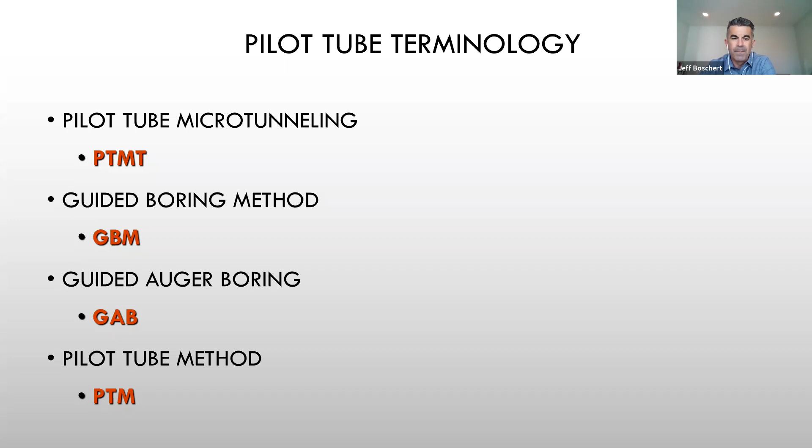We spent about 4 years drafting an ASCE manual of practice, and we published it in August of 2017. We went round and round with what to call this thing, and we settled on, there's a picture of it on the screen, pilot tube and other guided boring methods. It's probably a 90-page manual published by ASCE, and I was one of the principal authors covering this technology.

Hey, I'm going to start with a video. This is one of the original videos, done by Bohrtec. They're a German manufacturer of equipment, and I've got many videos throughout this whole presentation. This one I think is 7 or 8 minutes long, and I'm going to play it now. I don't need to talk because there is sound.

Pipe jacking and microtunneling has been proven throughout the world as an economical and environmentally sensitive method of installing underground services.

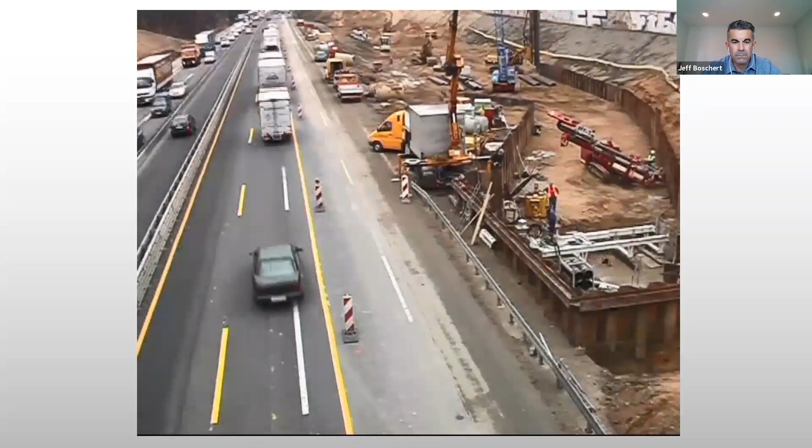The advantages of this technology are obvious, especially in towns and cities, where utility services can be installed underground without disrupting traffic flows or interfering with daily life.

The special advantages of the guided auger boring systems, like the quick setup times, minimum site facilities, high jacking performances, simple operation, and low capital investment, can combine into a highly profitable operation, which has been demonstrated worldwide by the installation of over 300,000 meters of ducts and drains.

The following sequence shows the laying of a 400 mm diameter sewer in a residential area using a Bohrtec BM400 with double-walled pilot rods and groundwater auger.

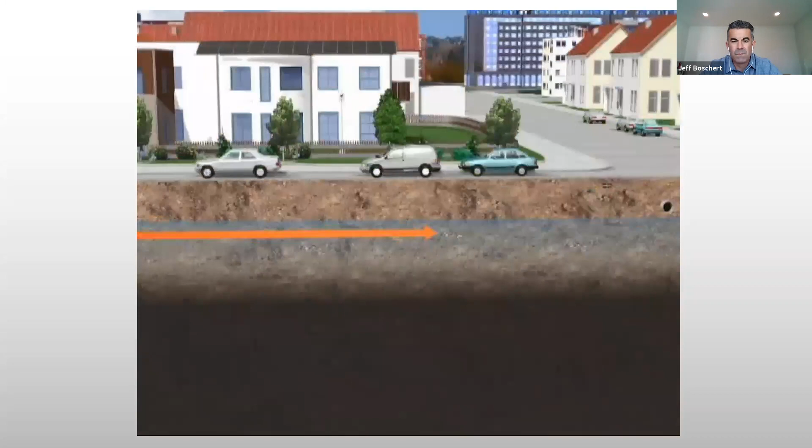The sewer is to be installed 4 meters below ground level and below the groundwater table from a working shaft of 2 meters diameter. Traffic is unaffected, and the new line can easily pass beneath existing services. Damage to the roots of trees and bushes is avoided by the use of this method.

Work on site commences with the construction of the launch and reception shafts by the caisson sinking method. The precast concrete sections are sunk into the ground as the soil inside is removed by the excavator. To avoid ground loss, the water level inside the shaft must always be higher than the water table in the surrounding ground. When the shaft has been sunk to the required depth, the concrete base is placed underwater.

The compact site setup consists of the boring container, the hydraulic power pack, and racks for the pilot tubes and auger casings.

After positioning the boring container above the launch shaft, the crane is extended so that the BM400 machine and base frame can be lifted out of the container by the 2.5-ton hoist. The cover boards are removed from the floor opening and used to form the guardrail around the top of the working shaft.

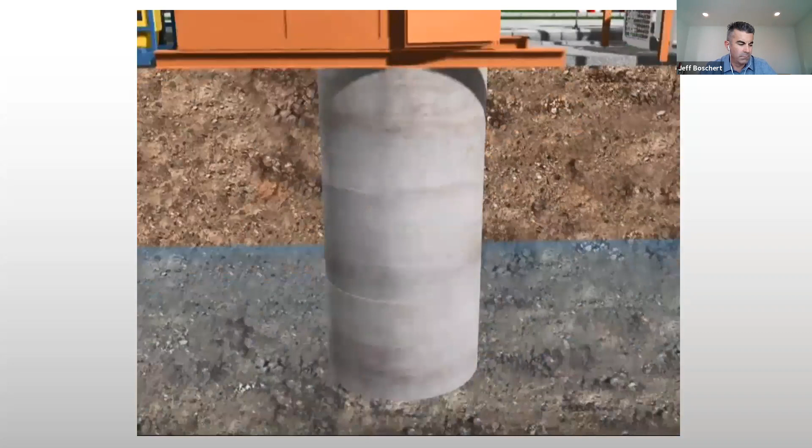The base frame is first lowered into the shaft and easily set for height, grade, and line before being braced in position. The BM400 is then placed on the base frame and fixed in position. Use of the base frame simplifies the operation and eliminates the difficult time-consuming job of aligning the boring machine.

After the machine is set up, the guidance system is installed. The theodolite with its electronic camera is mounted on a height-adjustable support, independent of the machine. The theodolite is set to the required height, grade, and direction. A monitor screen fixed onto the wall of the shaft allows the operator to view the target through the theodolite-mounted camera during the piloting operation.

The first step is to install the pilot rods. The double-walled pilots consist of a pilot head with an integral LED target, an outer screwed casing, and an inner pilot rod.

As the pilot is advanced, the camera on the theodolite can view the LED target on the pilot head through the hollow pilot rods, and the crosshairs on the monitor screen indicate the correct alignment. By rotating the inner pilot rods, the operator can turn the pilot head to use the inclined plane at the front to correct any deviation from the intended line or level.

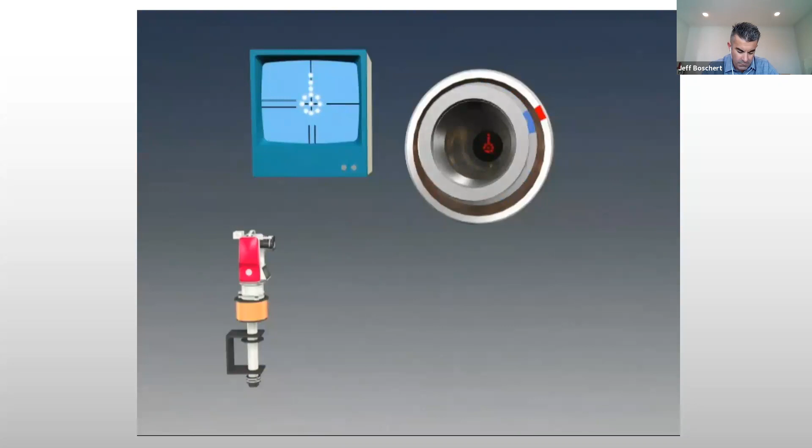The pilot head is pushed out of the launch shaft through a flexible seal and into the soil. Pilot rods are added and jacked into the ground.

The pilot rods are jacked into the ground without rotation, but if any deviation from the intended alignment is visible on the monitor, the jacking is stopped and the pilot head is rotated to correct the deviation, after which jacking continues. The inclined plane on the pilot head creates a reactional force from the surrounding soil to achieve the steering correction.

When the pilot head arrives on target at the reception through the seal, the pilot rods with the pilot head are disconnected and lifted out of the shaft.

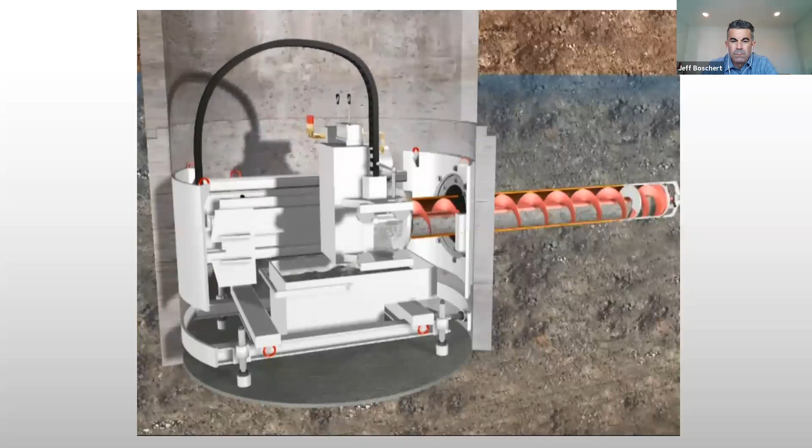The pilot rods are then followed by a reamer coupled to steel casings with augers inside. The ground is excavated by a special cutting head on the reamer and transported by the augers back to the muck skip in the working shaft.

The reamer with the groundwater auger is connected via steel arms with the pilot rods. The special cutting head works behind the steel arms.

In the case shown, the reamer is designed as a groundwater auger. In the first steel casing there are two bulkheads, each with openings in the lower area. The auger in this casing also has two bulkheads, with their openings 180 degrees apart. Thus, only one pair of openings through the bulkhead walls is open for the transport of excavated material at any time during rotation of the auger. When the back bulkhead is opened, the front bulkhead is closed. When the back opening starts to close, the front one starts to open, and vice versa.

The excavated material that is conveyed out by the augers falls into the muck skip in the working shaft. After the completion of each boring stroke, the muck skip is lifted out of the shaft and emptied before the next casing and auger are put in place.

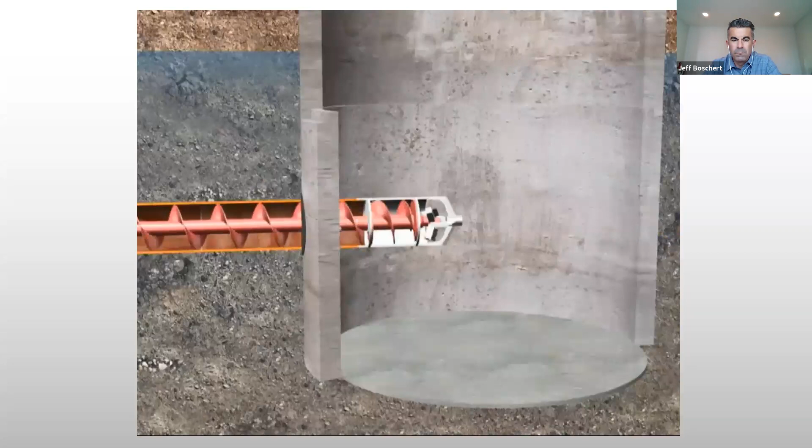When the reamer reaches the reception shaft, it is disconnected and lifted out.

If product pipes to be installed have the same outer diameter as the casings, then the first product pipe is coupled to the casings in the launch shaft and jacked into place in the third step of the operation, like the clay pipes in this example.

During this operation, the jacking force only has to overcome the skin friction.

As the product pipes are jacked into place, the augers and casing are disconnected and lifted out. When the last casing reaches the reception shaft, the jacking procedure is completed. After an inspection, the sewer can be commissioned.

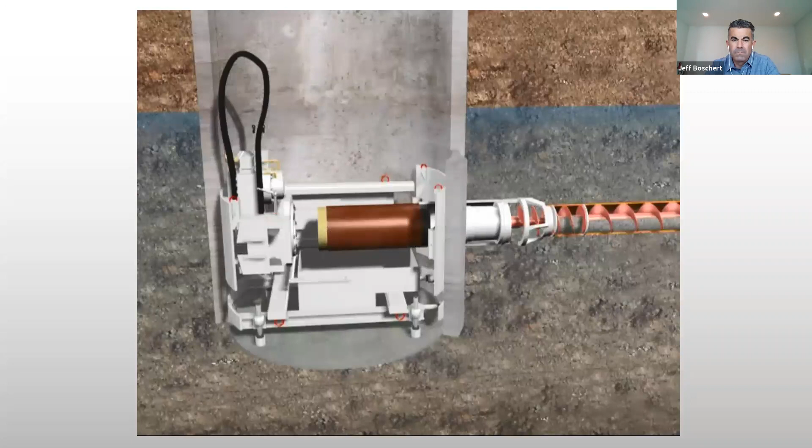If a sewer with a bigger outer diameter is to be installed, a second reamer enlargement is used for the third step. In the launch shaft, a reamer with a direct drive unit is coupled to the last casing. The product pipes are pushed in directly behind the reamer. The drive unit in the reamer is powered through hydraulic lines that are laid through the following product pipes.

The ground is excavated with a special cutting head and transported through the steel casing to the reception shaft by the anti-clockwise rotation of the augers. The excavated spoil is removed from the reception shaft.

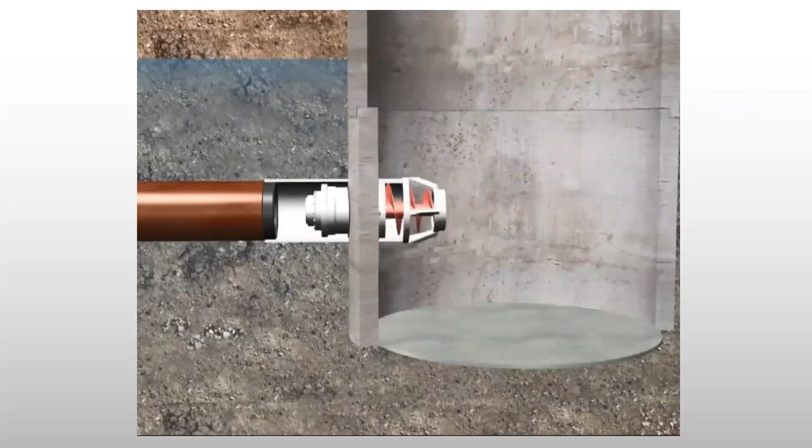When the reamer reaches the reception shaft, the sewer is complete. The process technology shown in this presentation makes it economically possible to achieve the benefits of trenchless technology, where previously open-cut trenching methods, with all the disruption and disadvantages, would have been used.

Yeah, that's a pretty good video that they put together. Back when it was sort of in its infancy stages, this method. But I guess as you can see, this method is...

It's highly accurate. It's a guided system of tunneling, and because of the kind of accuracy that it has, it's primarily used for gravity flow pipelines, but it doesn't have to be.

The video showed sort of the generic method, which is pilot tubes, and then the reaming head and thrust casings, followed by the product pipe of the same size. And then they also showed there at the end, if you had a larger diameter product pipe, to go in with a powered reaming head.

But the accuracy of this system is about a quarter inch in 500 feet on line and grade, and the way it steers, there's no ups and downs. It's like a rifle barrel.

But the construction of these projects begins with the installation and building of the shafts. An 8-foot round is the smallest jacking shaft that you could have, and it's pretty common, 8-foot round pits, and they're dug with an auger rig.

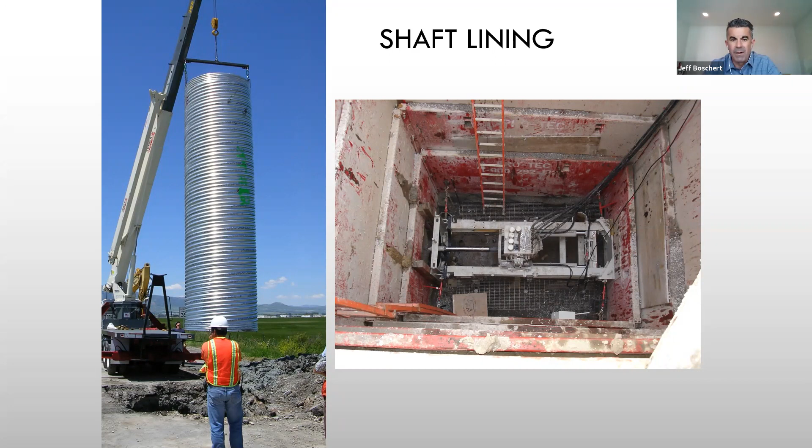This is a video of a shaft installation. I think it's a video of, they've already dug the shaft and they're dropping the liner down to the bottom.

This is another round shaft, larger size, but this was a deep shaft on a project I was involved in, north of me in Milwaukee.

But this is what they call a ring beam and wood lagging shaft, and these are constructed—they dig down and construct another ring and keep going down. And this one was about 45 feet deep, dug with a long arm excavator and then a mini excavator in the bottom.

But this one, I think, is a 12-foot diameter on that bottom section, and they've tunneled out three different runs out of this.

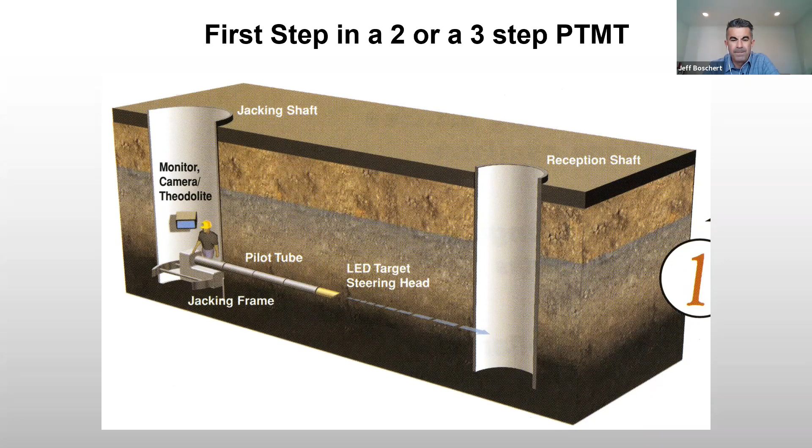Again, for displaceable ground, there are several different angled steering tips that can be put on - there's a 30 degree, a 45 degree, and a bullet. It all depends typically on the SPT value or blow count values of the soil they're tunneling through.

Step 1 in the guided boring method is the installation of the pilot tubes on line and grade. The 4-inch pilot tubes are pushed through the ground from the launch to the reception shaft. The leading end of the pilot tube is the angled tip steering head, which holds the LED illuminated target visible through a theodolite, camera, and monitor. The theodolite and digital camera are set on the desired line and grade and positioned to view the target through the center of the pilot tube. The crosshairs of the theodolite are visible on the monitor along with the illuminated target.

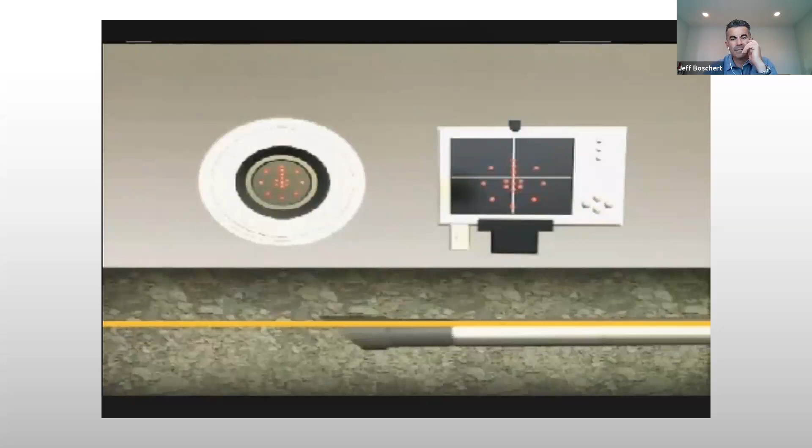The operator rotates the steering head as needed to maintain the desired line and grade. By using a computer monitor and digital camera to view the output, the signal can be digitally enhanced, allowing for an extended run. This guidance system has ensured line and grade tolerance of 1/4 inch in distances exceeding 500 feet. The dual-walled pilot tubes provide a means to lubricate the outside of the tubes as they pass through the ground, which reduces the force required to thrust and rotate during installation.

I just can't stress enough how accurate the system is. This was a photograph taken of an existing manhole that they were saving, and the contractor, on his second drive, rented the equipment and was tunneling.

I think it was a 12-inch pipe into this existing manhole. So he set up a jacking pit, and then sent a crew down at the receiving shaft, which was again this existing manhole, and they cored a 6-inch diameter hole in this manhole to accept the pilot tube. This was back in 2016, a 280-foot shot from the jacking pit to this existing manhole, and you can see how accurately they hit this hole that they cored.

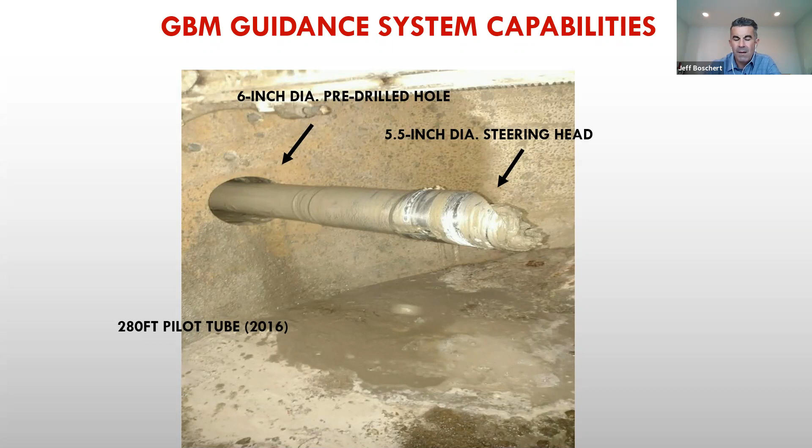Okay, this is the second step, kind of like you saw in that first video done by Bohrtec. So again, the pilot tubes are installed from one end to the other. That was the completion of step 1.

Step 2 is they install a reaming head, followed behind by an auger, or some people call them thrust casings. At this stage of the game, they're taking on spoil. So the spoils around the displaced ground, if you will, around those pilot tubes would enter this reaming head and then be augered back in typical auger bore fashion back to the jacking shaft where it's removed.

The earlier video you saw showed they had a muck or skip box down within that frame. When it gets full, they have to pull it out and unload. Some of the guys here around the country use a vacuum truck, and they send that 4-inch vacuum pipe down to the bottom, and they just vacuum it out as they install.

All the guidance equipment that you saw in the first step slides, all that comes out, because once the pilot tubes are in, everything else that goes in behind them follows that same on-grade path.

At this second step, there's a crew at the receiving shaft. As they get a full stick of pilot tube entering the shaft, they take it apart and it comes out. Then there's a crew at the jacking shaft end installing temporary augers and casings, and taking spoil out at the same time they're pushing. The two common sizes for reaming heads and auger casings behind the pilot tube are 11-inch OD and 16-inch OD, the two standard sizes that are made.

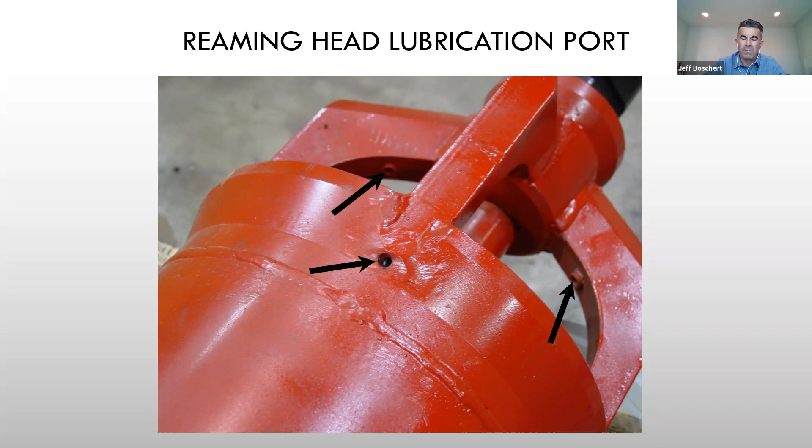In order to hook up a lube line to that reaming head - this is a picture in a receiving shaft where they've already installed the pilot tubes - they would send a commonly 3/8 inch diameter line through that hollow pilot tube, because they don't need that hollow path anymore for line and grade since the grade's already been established. It hooks onto the front of one of these reaming heads, installed directly behind, and provides a path for lubricating the friction or the spoil inside.

Okay, here's a video of step 2, what we just talked about.

Step 2 is to increase the bore diameter by following the pilot tubes with a reaming head that matches the diameter of the final product pipe. The reaming head and temporary casings and augers are attached to the pilot tubes and advanced by the jacking frame. As the temporary casings advance, they push the pilot tubes into the reception shaft, where they are removed. Spoils are removed and transported by the augers back to the launch shaft and fall into a dirt bucket, which is emptied when full.

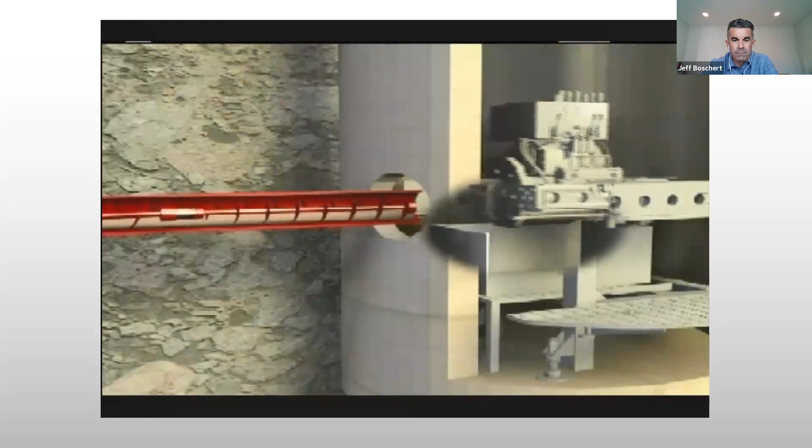Okay, the final step, and this is the generic process where the OD of the final product pipe matches the OD of the auger or thrust casings installed in step 2. Again, the two most common sizes for those casings are 11 inch OD, and for a clay jacking pipe, that's an 8-inch ID jacking pipe with an 11-inch OD. So that's the size. When 8s are installed, it's always done this way, size on size.

So 4-inch pilot in step 1, 11-inch auger casing in step 2, and then 8-inch jacking pipe in step 3, and then they're done with that drive, or 12-inch. The OD of 12-inch jacking pipe is about 15.9, so the 12-inch would follow directly behind the 16-inch OD size casing. But in this step, the load on the jacking pipe is solely the frictional load to push those casings into the receiving shaft. So all they're doing in step 3 is replacing the casings with the pipe.

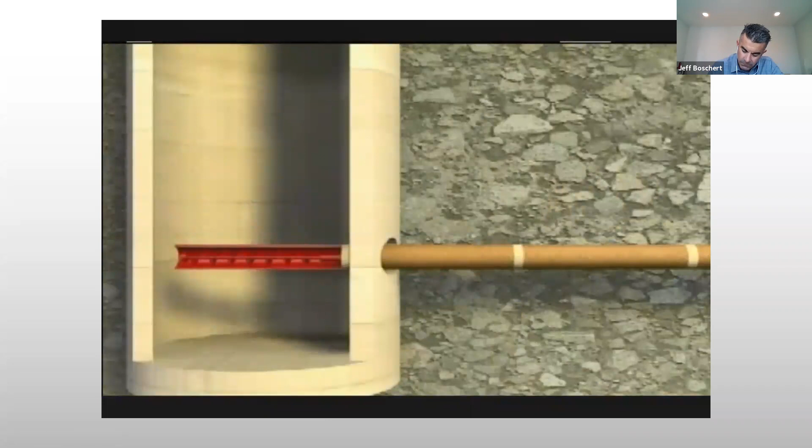Step 3 is the installation of the final product pipe. A pipe adapter is installed on the last section of the temporary casings and augers to match the final product pipe. Just as the temporary casings and augers replaced the pilot tubes at the receiving end, the final product pipe pushes the temporary casings and augers into the reception shaft, where they are removed. The process is finished when the product pipe reaches the reception shaft.

You guys, I like a lot of videos. I think maybe it grabs attention more, but here's another video. This is one I shot.

This was a project, I live in the St. Louis area, this one not too far from my house. It's an 8-inch pipe, 1 meter, and they're assembling those pipe sections. This is in that third step, and they're pushing out 11-inch, 1-meter long casings into the receiving shaft.

So in this one, you're going to see the guy lubricate the joint. He homes the pipe. You'll see a line — they've got a line running inside the pipe, and it was a lube port at the tail end of the casings. They never did hook it up. They were worried their pressures would go high pushing the product pipe, so they had it just in case, to lube if they needed to.

That's that lube line.

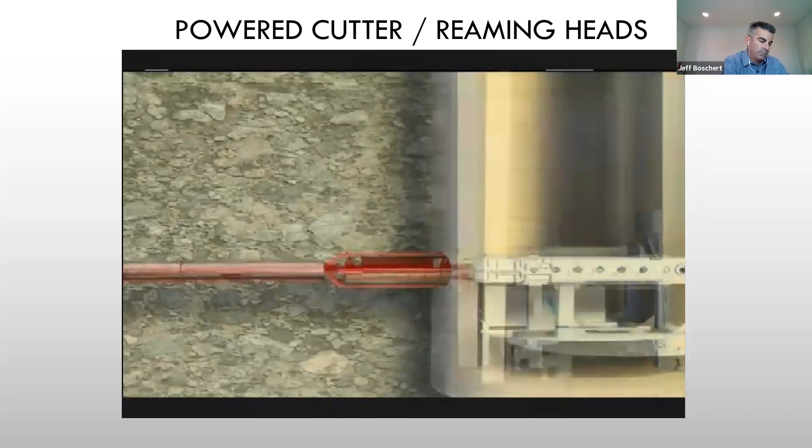The powered cutter head still uses the three-step GBM process. As previously shown, step 1 installs the pilot tubes on line and grade. During step 2, a reaming head and temporary casings and augers are attached to the pilot tubes. The powered cutter head is added in step 3 and is used to increase the bore to match the final product pipe diameter. Final product pipe is added behind the PCH.

The direct drive at the cutter face allows the GBM to work in a wider range of soil conditions while maintaining speed and accuracy. The augers are reversed by the PCH's hydraulic drive, and the spoils are pushed to the reception shaft while the rotating head cuts the tunnel to the final diameter.

Okay, so the powered cutter or reamer typically is for larger diameter pipes, when the final product size is bigger than either the standard casing size of 11 OD or 16 OD. So they would couple on this powered cutter or reaming head and take on the additional spoil.

That spoil enters the front of one of these heads, gets turned around inside, and then sent forward through the augers. The augers are reversed, so this additional size that they're cutting on the bore gets sent to the receiving shaft, along with the thrust casings installed in Step 2.

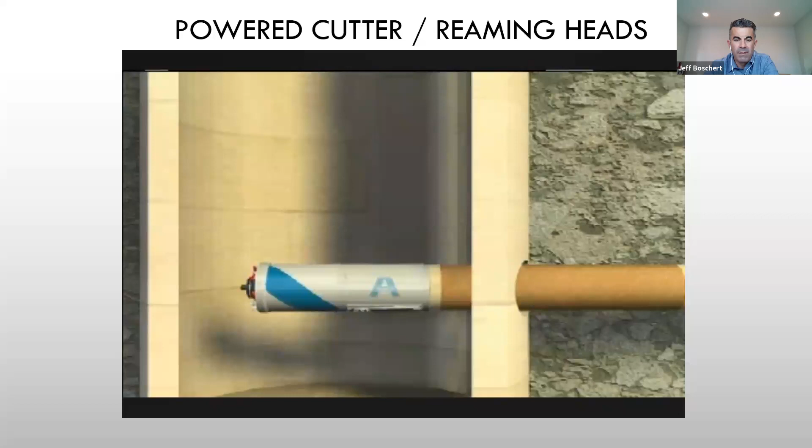And these are some of the common sizes. There's a 20-inch, a 22.5, and a 28.5 powered cutter, and then there's two larger sizes, a 36 and a 44 OD.

So looking at the front of that powered cutter head, you can see what looks like the spigot end of one of those 11-inch OD casings. So they would lower this section down, and it would hook up to the last casing installed in Step 2, and then the jacking pipe would advance this unit because it's the same OD.

So this thing's doing two things. It's got a rotational cutter spinning that's cutting this additional ground from the 11 OD up to 22.5. And then there's 4 windows in this particular one. So as the soils are cut by these picks, it would enter the head, get turned around inside, and then sent forward through all those casings installed in Step 2.

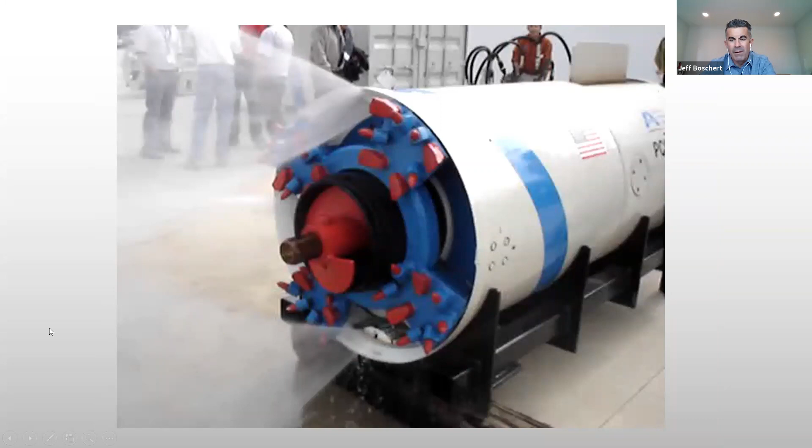Here's a video here. I took this at a demo. I forgot where, but these powered cutters, they've got jets in the front to ease that spoil travel. So this was one. You can see how this thing drives.

That one there is a 36-inch OD unit, but you can see, it's got several drive motors in it. One or two drive the powered cutter itself, and then the other one powers the auger inside in that reverse direction.

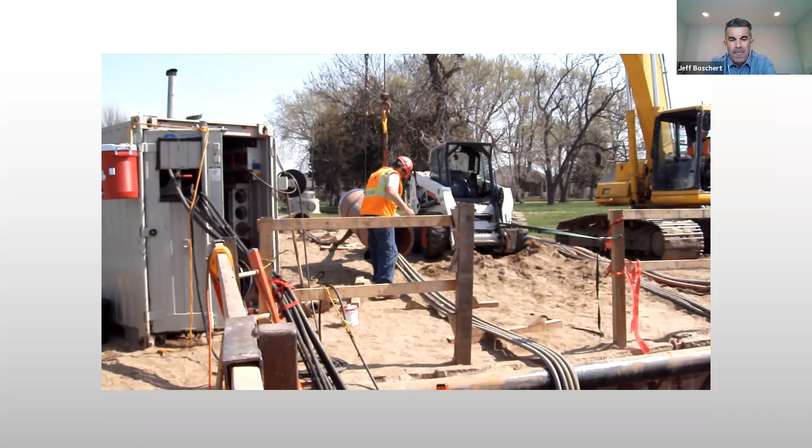But what I didn't mention, and you saw it in the video, whenever there's a powered cutter or powered reamer project, something's got to drive that unit. There's hydraulic lines that have to be snaked through the jacking pipe. So commonly they stage the pipe at the surface with the hydraulic lines already mated inside of them, and then they've got to lower those pipes down with the lines inside to keep going.

So here's a video of lowering one of those pipe sections. This one's a 2 meter. I kind of forgot the size.

But again, whenever one of these is used, remember the spoils are coming to the reception shaft at the same time the augers are. So the guys at the receiving shaft are really doing double duty. They're dealing with the spoil, number one, as well as once they get a full stick of casing and auger, they've got to take it apart as they're pushing pipe.

There's also the powered reaming head, which is really what that first video showed. This is the same concept as the powered cutter, except it doesn't have this wheel in the front to cut soil. And these are commonly available from 14 OD to 20-inch OD.

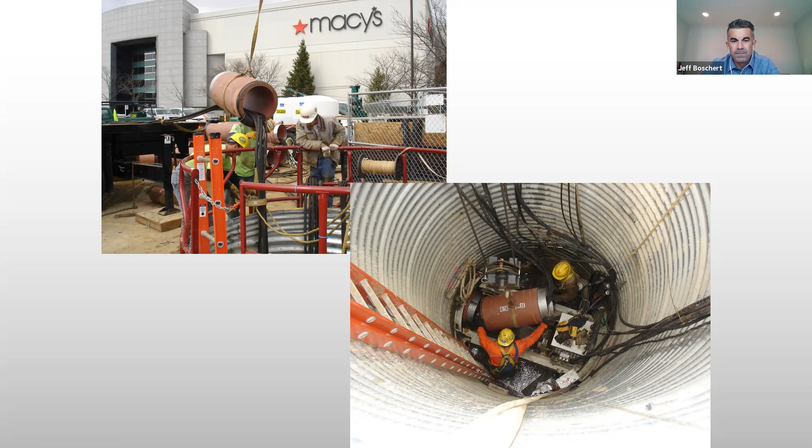This is a shot of a powered reamer, I think from a 15-inch project. This is a 20-inch OD powered reamer, and on the front here, this is a 16-inch OD casing. So they only had to go a little bit larger to push these. There's the 15-inch jacking pipe, that's a 2-meter stick. But again, that pipe is advancing this powered reaming head unit.

Here's a shot of a reception shaft, 8-foot round. This is the 22.5-inch powered cutter head for 18-inch pipe being retrieved. Notice the muck box in the bottom. These guys were dealing with the spoils as well as the casings, and this is the final step here of the pipe pushing that powered drive unit, powered cutter head unit into that receiving shaft.

There's another process I didn't talk about yet. What I just showed was the conventional 3-step method, with the size-on-size jacking pipe to auger. And then I also showed the increased technology where in that 3rd step you've got a powered cutter or powered reamer with a larger diameter jacking pipe.

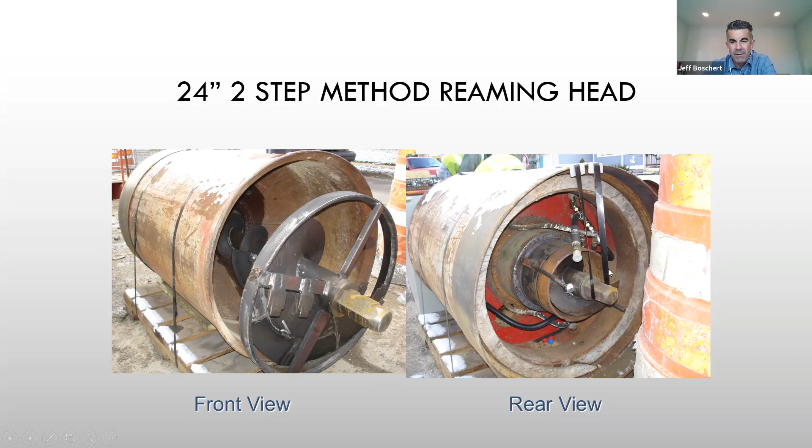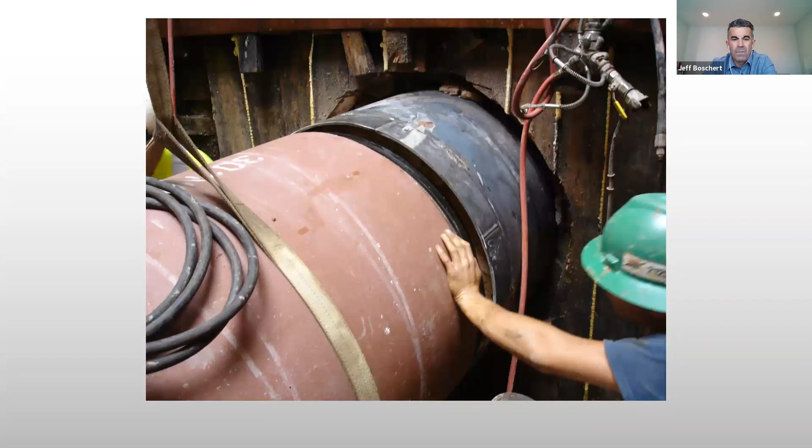I guess I'll say one more thing. This is the end of that two-pass discussion. But really the advantage of the two-pass is...

The contractor would only have to invest in the frame, pilot tubes, and say he bought 11-inch augers, he could buy a couple different size two-pass heads and be able to install multiple pipe sizes for a project or projects, just by buying a different sized two-pass head. So that's the advantage for the contractor. The disadvantage is necking down on the material and having a possible problem.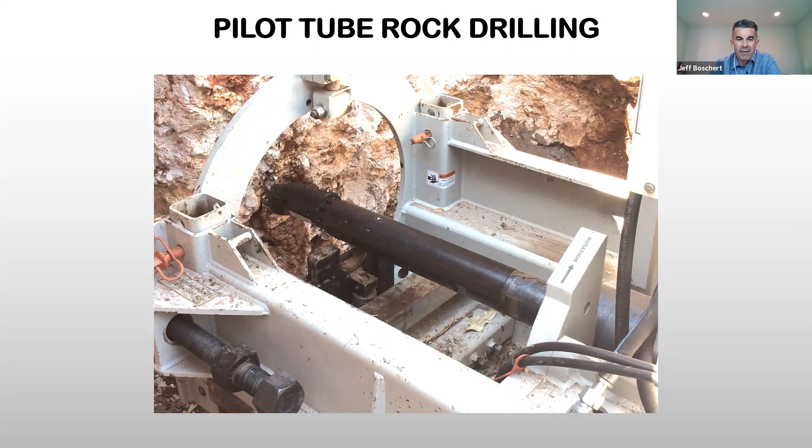And then this is a video of going in with a rock drill, one of these rock drills. And again, they're not displacing the soil. They're cutting it, and then the cuttings are being blown back into the jacking shaft. So here's a video of going in with one of these rock drills.

But anyway, the way this works is they're rotating to cut, but then they're actually guiding it. They can still guide it, change directions. They can still guide that thing on line and grade because they've got the same theodolite camera, LED target, monitor screen. But they've done up to about 12,000 PSI rock, or if you want to call that soft rock, you could.

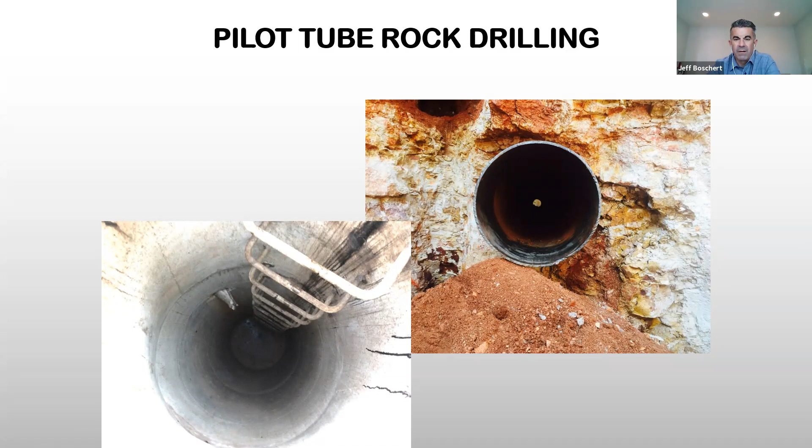Another shot here of some of this hard ground rock drill equipment. This was some kind of a red shale stone that they were cutting. Again, non-displaceable type ground.

Hey, this is a video. It's another one done by Boschert, the German manufacturer, and you know, this is guided boring, but without a pilot tube. Both of the two manufacturers of this equipment, they make this guided boring, but there's no pilot tube. And what they both use is a hollow stem auger, and that's what provides that sight path to the target. And this is for these harder grounds, not as hard as rock, but these SPT or blow count values from 50 to 100. And one manufacturer calls it the front steer, the other manufacturer calls it the eliminator. And this is a video of how that works.

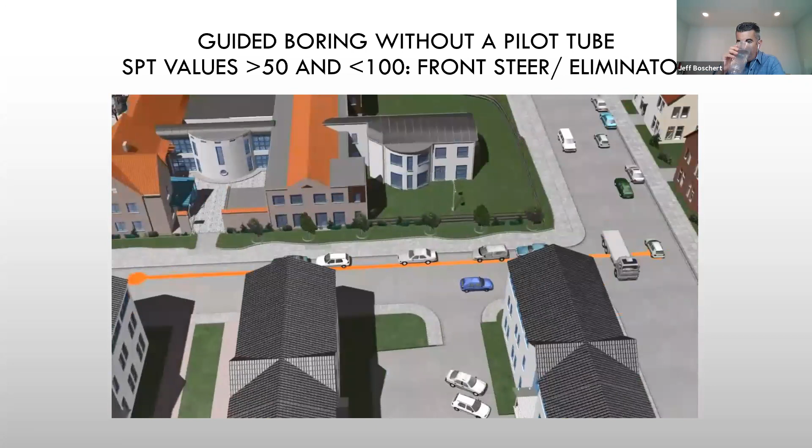The following sequence shows the laying of a 300 millimeter diameter sewer in a residential area. A guided auger boring machine from Boschert with a novel steering technology called front steer is used. The sewer is to be installed 4 meters below ground level in a non-displaceable mudstone from a circular working shaft. Traffic is unaffected, and the new line can easily pass beneath existing services. Damage to the roots of trees and bushes is avoided by the use of this method.

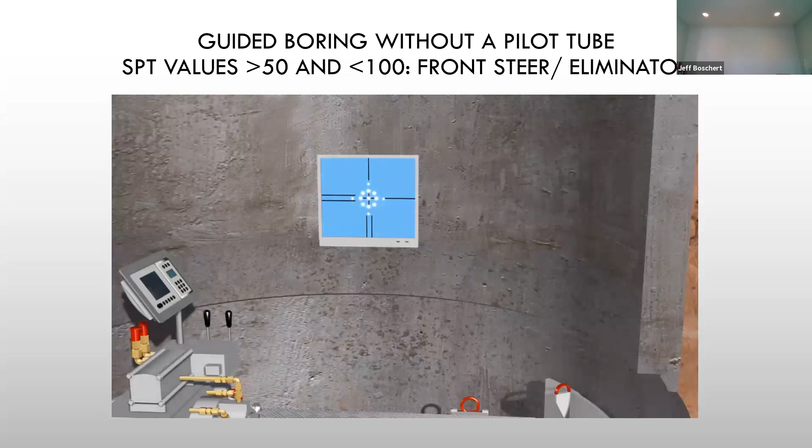After the machine is set up, the guidance system is installed. The theodolite with its electronic camera is mounted on a height-adjustable support, independent of the machine. A monitor screen fixed onto the wall of the shaft allows the operator to view the target through the theodolite-mounted camera during the guided operation. With the help of a steering and control panel, showing the position of the front steer, the operator can perform steering movements.

In the first step, the guided drilling is performed by excavating the soil with the front steer. Hollow augers transport the excavated soil to the working shaft. The camera on the theodolite can view the LED target on the cutting head through the hollow augers, and the crosshairs in the monitor screen indicate the correct alignment.

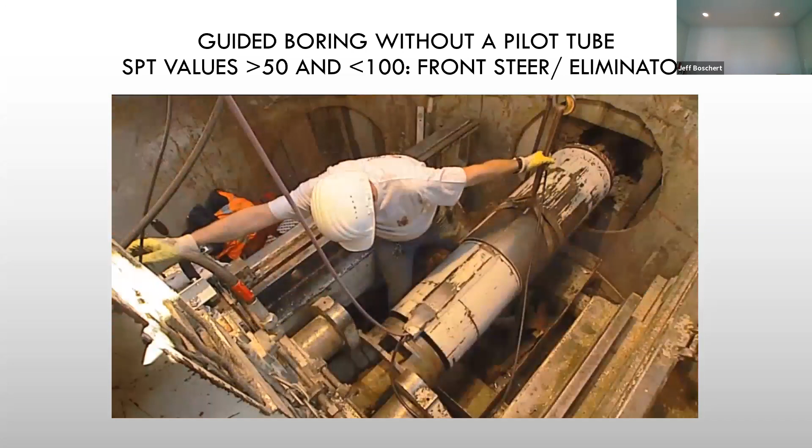The front steer is pushed out of the launch shaft through a flexible seal and into the soil. Steel casings are added and jacked into the ground. The excavated soil is transported by hollow augers to the working shaft.

The excavated material that is conveyed out by the hollow augers falls into the muck skip in the working shaft. After the completion of each boring stroke, the muck skip is lifted out of the shaft and emptied before the next casing and auger are put in place.

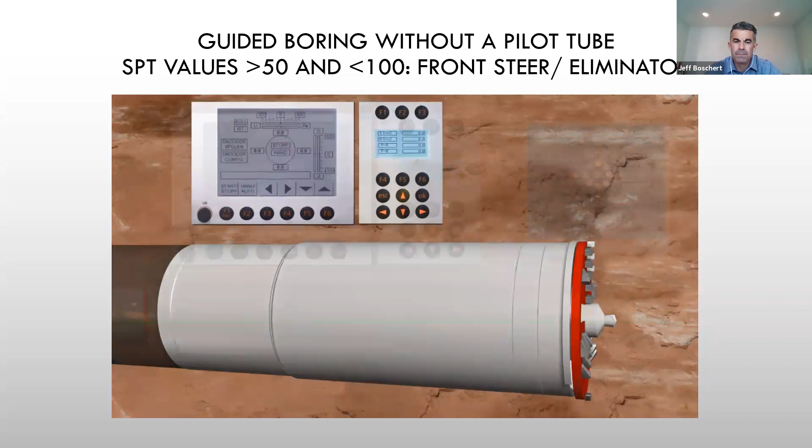The operator can move the steering pipe of the front steer with the help of the operation panel to correct any deviation from the intended line or level. If any deviation from the intended alignment is visible on the monitor, the operator changes the position of the steering pipe to correct the deviation while the jacking procedure continues. The inclined position of the front steer creates a reactional force from the surrounding soil to achieve the steering correction.

If necessary, it's possible to activate a high-pressure water flushing system behind the cutting wheel. After arriving on target at the reception, through the seal, the front steer is disconnected and lifted out of the shaft.

Anyway, you can see that's also a highly accurate line and grade technology, suitable for gravity flow pipelines, but it doesn't have to be. The steering with either the front steer or the eliminator is a little bit different on the two different brands out there, but they both use that same technology for guidance with this hollow stem auger to provide that sight path.

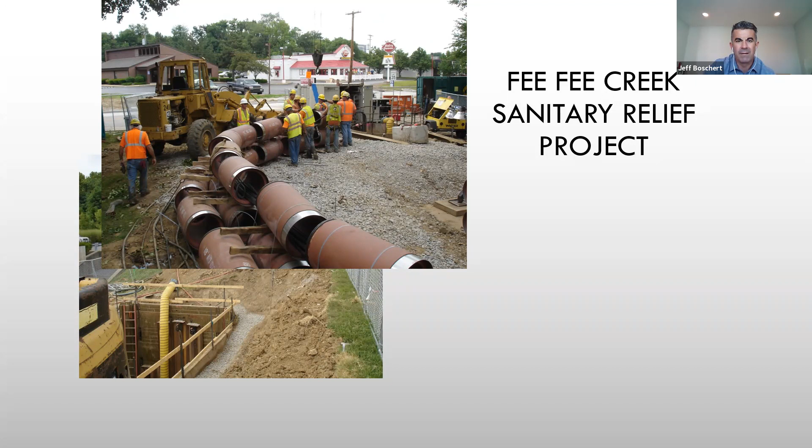This is the launch of the powered cutter head. This was again a 3-step process where step 3 was the powered cutter in the pipe, 18-inch ID, 22.5 OD. That powered cutter head breaks in 2, so this is the front half of that being launched.

Another shot, again the same shaft. The boom truck was over here - you can see the hook up top. Again, 8 foot round pit right here.

There's a shot, same shaft, pushing the pipe - again 18-inch, 1 meter sections. What dictates the pipe length is the size of the shaft and the size of the jacking frame.

I think this was a jacking and a receiving pit right here. This one was a slide rail shaft, a larger shaft. They were able to jack 2 meter pipes out of this pit. Another shot there, same pit.

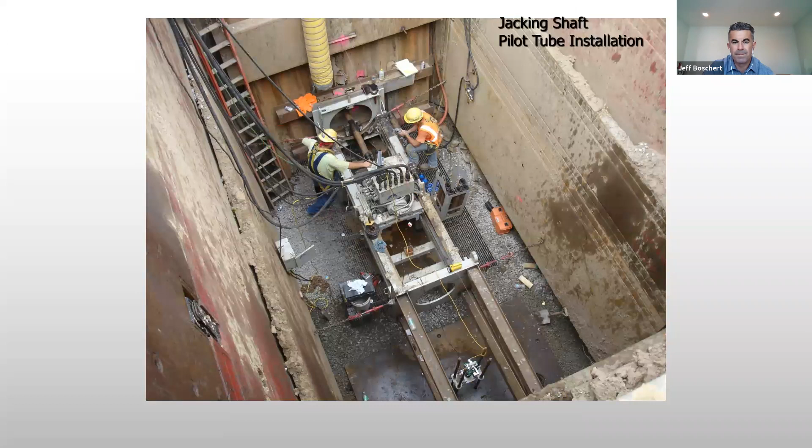This one here, that's inside that same pit. This is pushing the pilot tubes, and you can see this is the pilot tube section here. This is the operator, this is the monitor screen, and you can see the theodolite is set up right here. It's independent of any of this jacking frame.

In case the jacking frame moves, they've got this pilot tube on target. You can kind of see it here - this is the string line. That's what they use to set the zero line for that theodolite to get it locked in place. And then the grade is dialed - once they have that line set, the grade is dialed in digitally.

You can barely see it, but this is the pilot tube that's made it into the receiving pit, on line and grade.

This is, I think, that same shaft, different day, pushing the product pipe. They were able to push 2 meter pipes out of this larger pit. But you can see the hydraulics - they've got hydraulics that come out of the frame, up top, and they snake through the product pipe, then snaked back down. They run through the product pipe all the way to the powered cutter head.

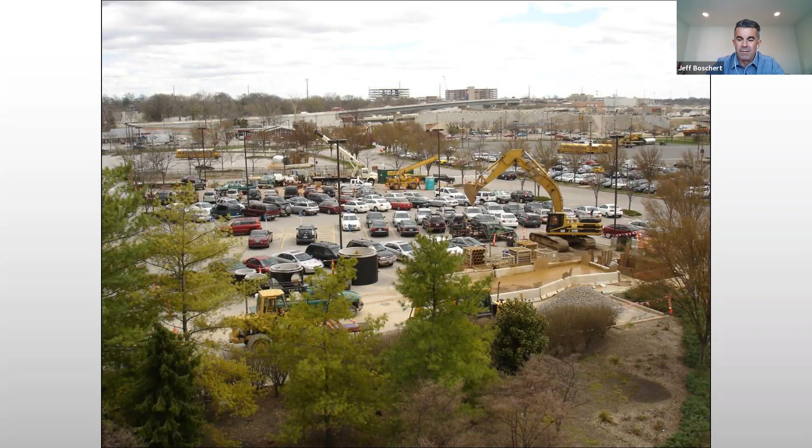This mall owner, in the contract, had about a 2-month period where they didn't allow the contractor to work due to the holiday season. But once he got started in late summer, they saw what kind of disruption he was creating in their parking lot, and elected to let them work all through the holiday season, because it was very limited disruption as well as impact to the parking lot.

But again, it was all out of 8-foot round pits. Powered cutter head coming in on the 3rd drive. But this was the impact.

This is probably the neatest slide from those photographs. This was the impact to all those 8-foot round jacking or receiving shafts. So the contractor came in and saw-cut these 10-foot by 10-foot sections in the parking lot, and this was just a week prior.

This was a jacking pit. They were tunneling 18-inch pipe both directions out of that pit, 25 feet deep on that project. And that's all that they had, less than 2 parking spots. Kind of neat.

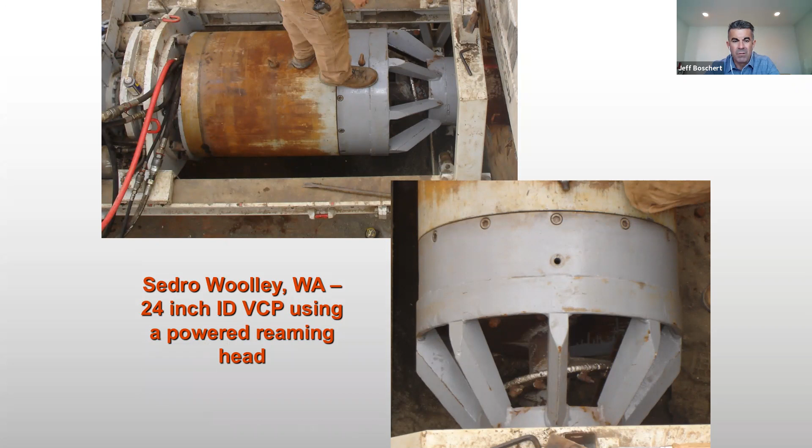Another project here. This was up in Washington. This was using a powered reaming head. It was a 24 ID, 30-inch OD project. These were 2-meter sections, slide rail shaft.

But again, this was powered reamers. So, as they're pushing pipe, this is happening in the jacking pit, and the same is happening in the receiving shaft, where you've got these augers and casings coming in, as well as spoil.

A little bit on hybrid methods. Pilot tube is not only used to install pipe in its conventional form, it's also used in pipe ramming, as far as a method of steering.

The contractor will come in and push a pilot tube on line and grade, then pull out that frame, use a pipe ram adapter, and go ahead and use a hammer and ram a casing in along that line and grade, in cases where the conventional pilot tube wouldn't work or the railroad wouldn't allow it.

A lot of times the railroad will want a ramming technology used, for fear of over excavation under a track. So they'll oftentimes specify a pipe ram, because there's no way that they could over excavate and have a settlement issue.

So it's used to steer, make it a guided pipe ram. Probably more oftentimes than that, it's used to guide regular conventional auger boring machines.

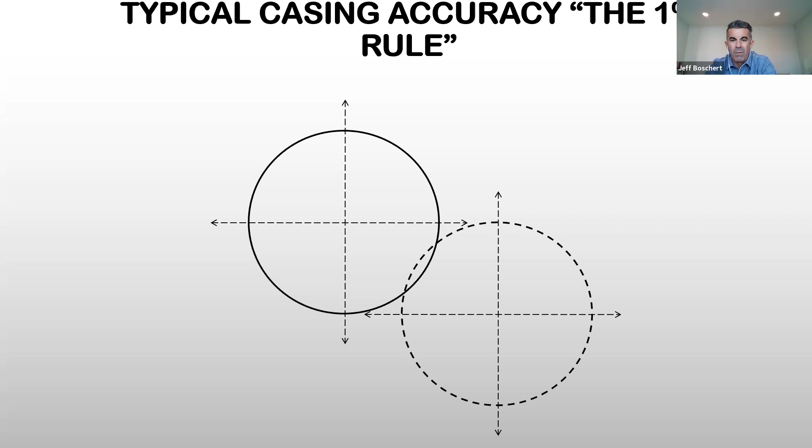Your typical auger boring is really unguided, with about a 1% accuracy rate for a conventional auger bore. So picture a 300-foot push, going by that 1% rule, you could be 3 foot off in that 300-foot drive. For a gravity flow pipe, most of the time that's unacceptable. With pilot tube, you get a quarter inch accuracy in line and grade on that casing, whatever size it may be, by having a pilot tube guide in the front.

Hey, how can that be? You're adding a step to this conventional auger bore, but it's commonly faster because they can push the casings faster. They don't have to worry about trying to steer it or trip all those augers out to make a steering correction in the front casing. And if there's an obstacle, you could possibly find it before they've even had the frame in position.

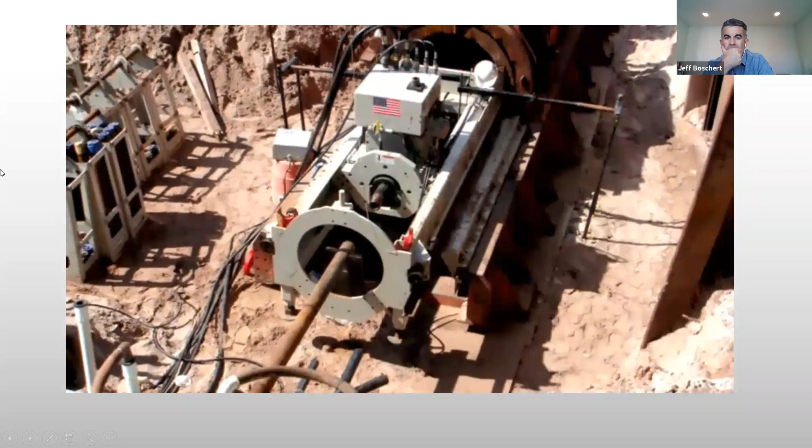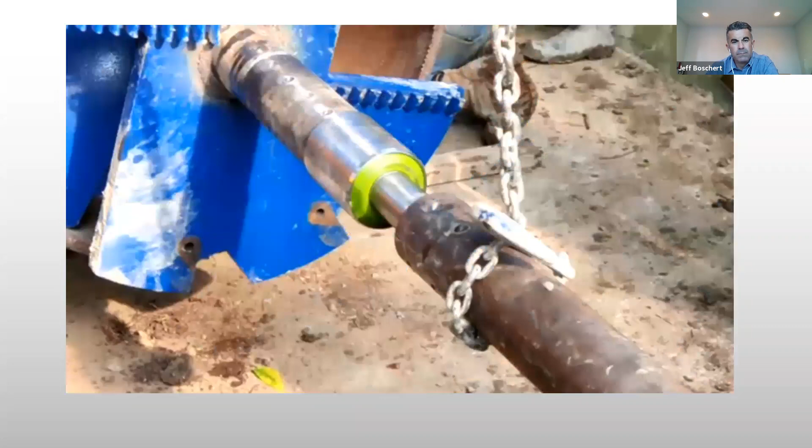One of the most popular methods for GBM applications is using it in conjunction with an auger boring rig when accurate line and grade are required. An unguided auger boring rig may have failed bores, creating very costly overruns in terms of steel casing pipe and man hours. The universal adapter makes using your GBM in conjunction with all auger boring rigs a simple process. A weld-on reaming head attaches to the pilot tube and is welded to the lead casing. The Akkerman Pilot Guide rod swivel is used with a rotating cutter head in place of a weld-on reaming head to reduce thrust at the face in hard soil. By using the Pilot Guide rod swivel with a rotating cutter head, rotating and over-torquing of the pilot tubes is avoided.

Here's a couple of animated illustrations of what this might look like. Again, step one is the same as you've seen: installation of the pilot tube on line and grade, with the target, the theodolite and camera, and then the monitor screen for the operator. Once it's in, this frame comes out, and then this would be a weld-on reaming head right here, followed by your conventional steel casing welded together. These pilot tubes are pushed into that reception shaft where they're taken apart and taken out.

That methodology works up to about 36-inch diameter, sort of the cutoff where you can go from that 4-inch pilot to a 36-inch OD casing. When you want to go bigger than that, there's a whole lot of torque in this auger. So going from the 4-inch pilot to something bigger than 36 inches, there's a chance you could break the connection right here at this pilot tube.

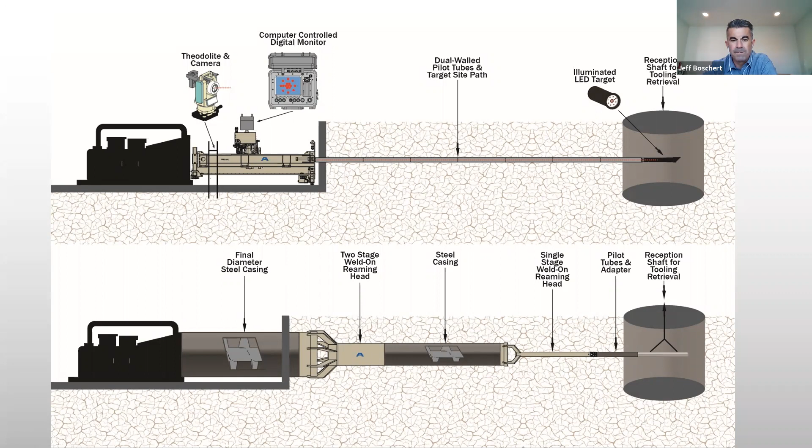So going bigger than 36, the rule of thumb is to go up to say a 24-inch weld-on reaming head, maybe one section of casing, and then this single-stage reaming head right here to go from say 4 to 24 for the first 20 or maybe 40 feet, and then use this 2-stage head to go up to your 54 or 60-inch casing. But again, same concept - pilot tube's always step one. This is one of those 2-stage heads right here, this is 24. I don't know what size that is, but bigger than 42 you'd want to use this, which is the next size up above 36.

This is a video, I think I'll go ahead and show this one, it's only a couple minutes. This was put together by a contractor named Kamloops, up in the Canada area. They did a pretty good job. There's no sound in this one, but this is, again, a guided auger bore - a highway crossing. This is an auger bore contractor, a big trenchless contractor that I think has pretty much adopted this technology. They do a lot of crossings with conventional auger boring, but they guide almost everyone now, I think, with the pilot tube.

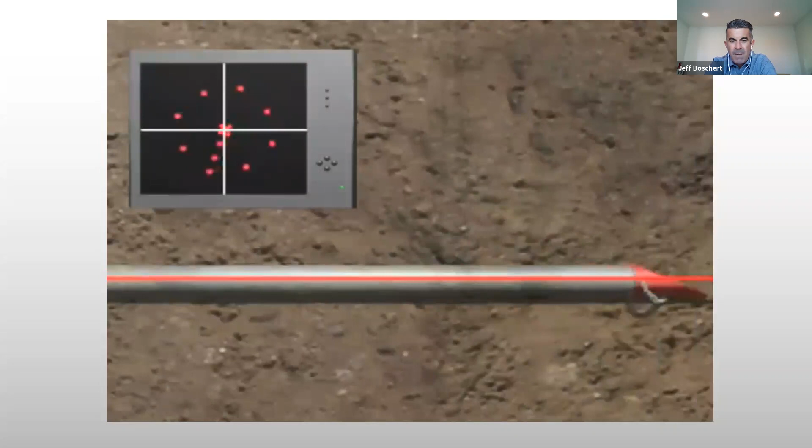Again, step one, displacing their soil, slant-faced head. I've been through this several times, you guys ought to be experts in this by now. But it's really a fairly simple technology. So again, step one's complete.

They've installed their pilot tube on line and grade. That frame can come out, and then it becomes a guided conventional auger bore, with a weld-on reaming head in the front.

The benefit to this is if there's a gravity flow pipe going inside the casing, they don't need to go as big, and they don't need to grade adjust, because they've installed this casing on the exact line and grade it needs to be. So it doesn't need to be as large, and could actually be cheaper - not as much excavation and not as large a casing.

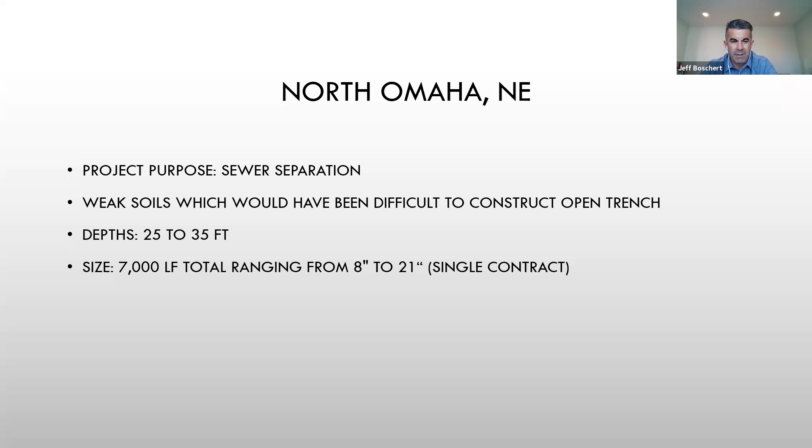Anyway, that's the process. I think this is my last project, then we'll take our break. This was a project in North Omaha, and it was a big project - I think one of the largest at the time. It was about a 7,000-foot project, all on a single contract, all 8 to 21 inch. The contractor used a little bit of conventional pilot tube, but then brought in some auger bore rigs and did sort of a hybrid technology. This was on the north side of downtown Omaha, Nebraska.

This was a waler and sheet piles type shaft system that they had constructed. They had a wide variety of shaft types. This is an auger bore rig, and that's a section of clay pipe up front.

They used a pilot tube machine to push the pilot rods on line and grade, then took it out. The contractor made up casings to the ODs of the jacking pipe, and used the auger bore frame to push those casings in place, push the jacking pipe in, and push those casings out the other side to be reused on the next drive of the same pipe size.

So this is a unique shaft - an 8-sided shaft, like a stop sign, but all built out of I-beams or W shapes and steel plate.

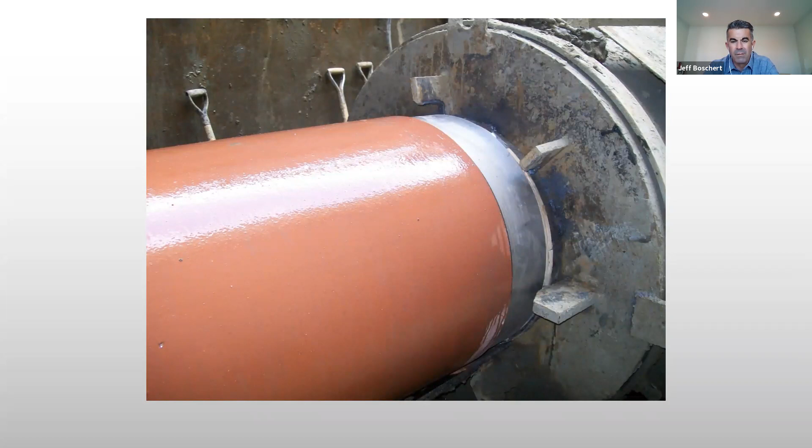This is the manhole bottom, and again those pipes were installed with a pilot tube and hybrid auger bore system. This was an adapter that they made - a pipe adapter made up inside that jacking pipe to be able to push it.

This one here is a reception shaft, and you can see this is the lead tip - the front end of the reaming head entering the shaft. Again, the pipe pushes all those casings out.

This one here, they're working on the invert - kind of a neat shot with at least two different pipe sizes all entering that manhole.

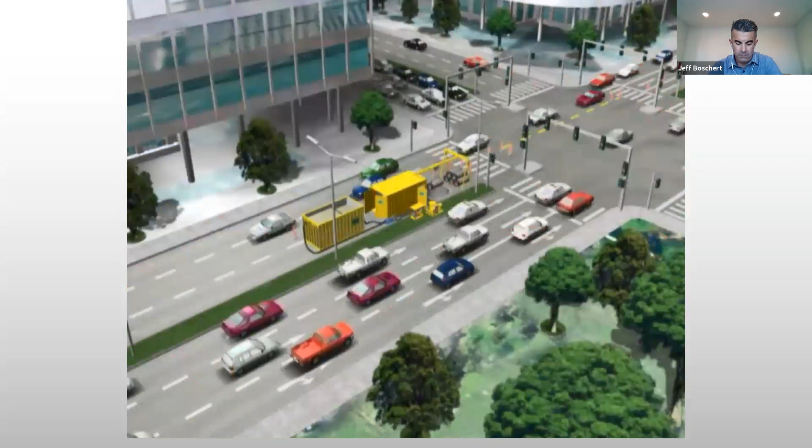Throughout the world, pipe jacking and microtunneling are becoming increasingly important for the installation of sewer pipes and service lines. The Herrenknecht AVN series introduced in this film has been deployed successfully on every continent. The advantages of the pipe jacking and microtunneling process are evident, especially in urban city areas, where pipe jacking causes minimum disturbance along the construction route, so there is virtually no disruption to traffic flow or impact to the local economy. In contrast to conventional methods, pipe jacking and microtunneling is an environmentally friendly method that helps conserve protected landscape areas. The following animation shows the installation of new sewer pipes within a diameter of 600 millimeters in an urban crossroad with dense traffic. The whole construction site can be located so that only one lane is affected. In our example, 150 meters of sewer pipes are to be jacked from the launch shaft to the reception shaft. At the first stage, the area around the starting shaft is cordoned off and traffic is diverted to the remaining lanes. Due to the compact design of the machine and the small diameter of the starting shaft, there will only be minor disruption to traffic flow. In this case, the start shaft consists of a round shaft of reinforced concrete with an inner diameter of 3.2 meters. The compact jacking frame is then placed into the starting shaft, and the slurry discharge pump is mounted on a platform adjacent to the jacking frame. The operating container with the control panel and a hydraulic power pack is located on the top rear side of the shaft. A pipe stock is then established and maintained in front of the shaft to feed the shaft crane. The slurry feed pump and the slurry discharge pump are connected to the settlement tank to form a closed slurry circuit.

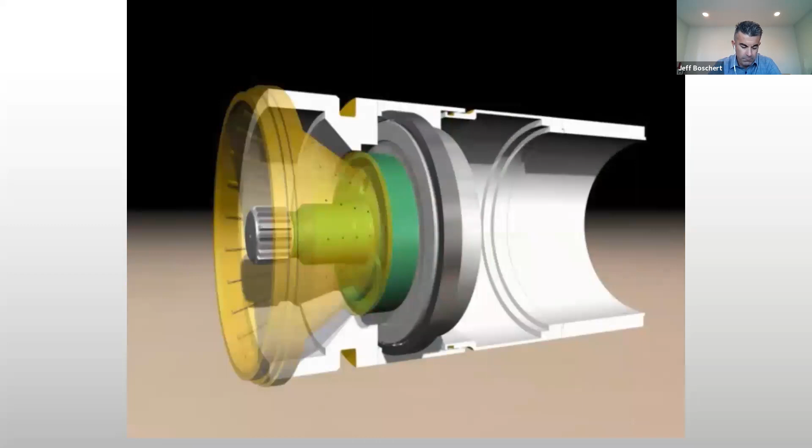The conical crusher situated in front has reinforced crushing bars and is provided with nozzles to inject the slurry water. The sleeve shaft, which is connected to the cutting wheel, is driven by hydraulic motors.

The sleeve shaft is seated in a tapered roller bearing. Three hydraulic motors transmit the rotation via the gear rim to the sleeve shaft and the cutting wheel.

Three steering cylinders enable the operator to correct the direction of the tunnel boring machine, as well as control the alignment of the machine in curved drives. Therefore, the position of the cutter head is continuously updated with the help of the laser guidance system.

To ensure AVN 600 has a smooth method of excavation, the machine has 2 integrated water circuits. The standard circuit supplies slurry water to the annulus via a hose fixed to the inner side of the bulkhead.

Several boreholes branch off from the annulus, which supply the chamber situated behind the conical crusher. The slurry water is continuously pumped through the conical crusher chamber, sucked off through the boreholes of the sleeve shaft, and transported back to the settlement tank by the discharge pump.

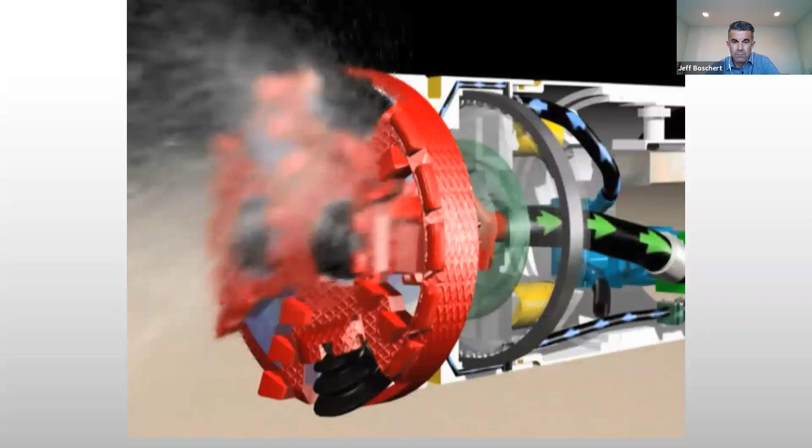A second hose supplies the high-pressure nozzles used in the conical crusher. These nozzles avoid clogging and agglutination in the crusher chamber in case of cohesive soils. They cut the clay in the crusher chamber with 250 bar water pressure and consequently make material transport easier.

There are also 2 nozzles that are directed to the front part of the cutting wheel. This totally depends on the geological situation, as the number of nozzles can be increased.

The water coming from the nozzles is mixed with the water of the slurry circuit and the excavated material. The whole mix is then transported to the settlement tank.

The cutting wheel excavates the material at the tunnel face. In the crusher chamber, the material is ground down to the appropriate grain size by the spokes of the cutting wheel, which operates on the same principle as a coffee grinder.

Large stones are crushed by the discs of the cutting wheel. Sometimes fragments are being displaced to the surrounding soil.

Stones, attaining the crusher chamber through the openings of the cutting wheel, are crushed by the reinforced conical crusher and the spokes of the cutting wheel, and afterwards transported together with the slurry water to the surface.

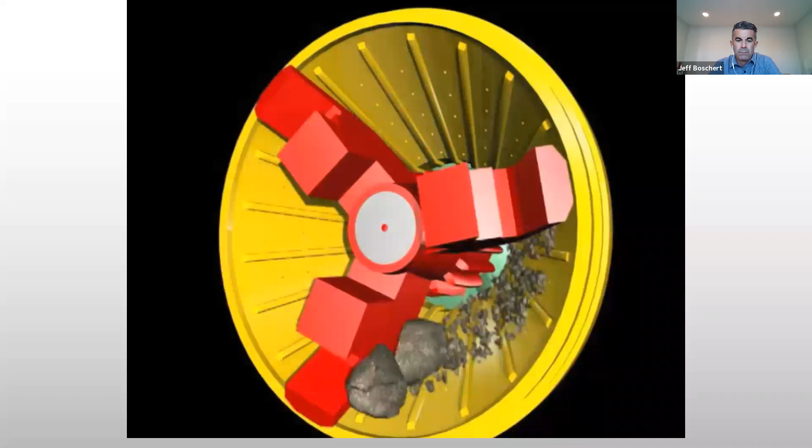The material is picked up in the slurry circuit and transported to the settlement tank through the central slurry discharge hose.

The slurry feed and discharge lines are passing through the jacking pipes via the jacking frame up to the surface.

The slurry discharge pump removes the excavated material and pumps it up into the settlement tank, which consists of 2 chambers.

At first, the excavated material is pumped into the rear chamber, where it settles due to gravity. The overrunning water is collected in the front chamber, from where the clean water is sucked by the slurry feed pump and returned to the slurry circuit, thus creating a closed system.

The product pipes are lowered into the shaft, one after the other. The jacking frame works in 3 stages.

After approximately 1/3 of the maximum jacking stroke, the jacking arms return and the main thrust ring of the jack can advance further. After jacking the product pipe, all supply lines, such as hydraulic hoses, are disconnected.

The jacking frame is returned to its original position and the next product pipe is lowered. This procedure is repeated again and again until the whole drive length is completed, reaching the reception shaft.

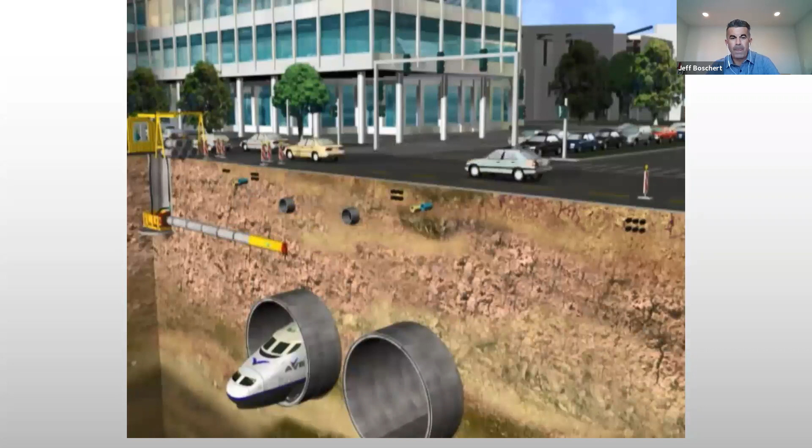Crossing pipes and buildings can easily be overpassed or undercrossed with this technique. Thus, the machine arrives in the reception shaft exactly at the planned coordinates.

The drive is continuously monitored by a laser guidance system. The laser itself is positioned in the starting shaft, meeting the laser target, which is installed behind the cutter head. The laser beam determines the reference axis.

The laser target identifies any deviation which may occur. The coordinates are transferred to the steering computer in the container and visualized on the screen. Any deviations in position can be corrected by adjusting the steering cylinders at the push of a button on the control panel.

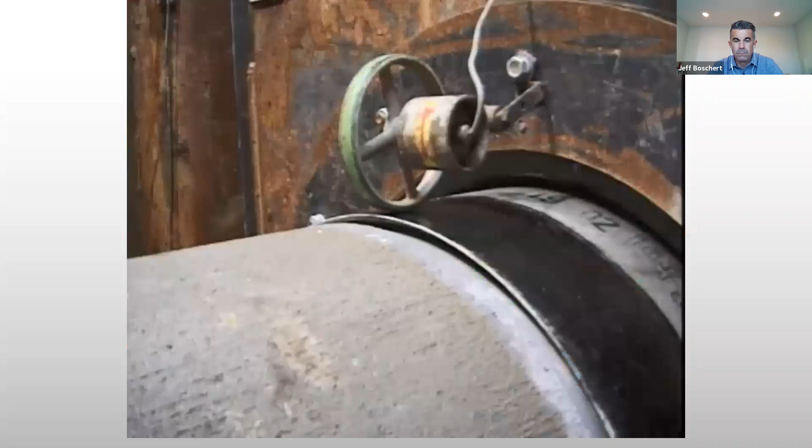The length of the tunnel is recorded by a metering wheel. This information is transferred to the control panel and allows the operator to determine the location and direction of the machine cutterhead at any time.

In our example, a total of 150 meters of new pipes could be realized with only a minimum of disturbance in a sensitive infrastructure. The conventional open laying of pipes would have caused major disturbance and annoyance for traffic and the residents.

Herrenknecht, being the leader in technologies for mechanized tunneling, has both the know-how and the experience to realize every tunneling project. Throughout the world, the company, with its headquarters in southern Germany, is the only supplier offering the entire range of tunneling machines, with diameters of 100 millimeters up to more than 14 meters. Hard rock TBMs, EPB machines, mix shields, and machines with partial face excavation, as well as pipe jacking and HDD equipment manufactured by Herrenknecht, successfully realize mission breakthrough all over the world and in every geology. 25 years of experience in mechanized tunneling, as well as the global service network, make Herrenknecht your competent and reliable partner.

As you guys can see, there's some differences between this and pilot tube. It's laser guidance versus a theodolite and sight path. There's no auger transport. It's all taken out with slurry, and with the slurry they can increase that pressure and balance any kind of a groundwater head.

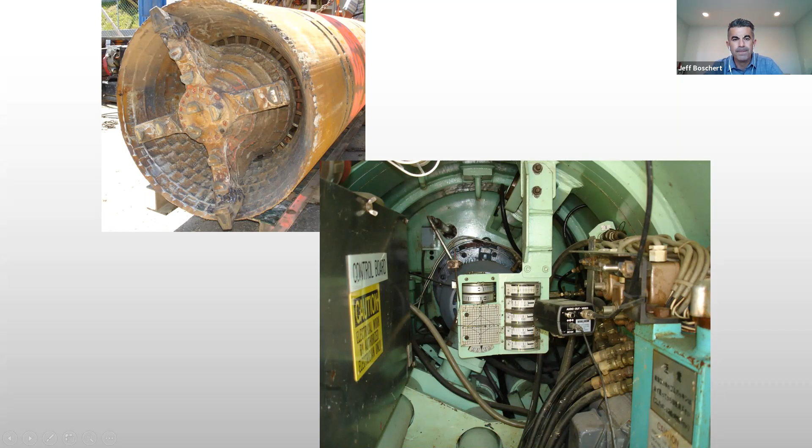This one's more of a mixed face with the picks and the buttons on the front, as well as the big open areas. More of a mixed face type MTBM head. So again, these things can handle pretty much all forms of soil condition. It's a guided technology, as well as can handle the water. So this is oftentimes the least favorite, if you will, because it's expensive. But oftentimes it's the only guided method that will work for the project.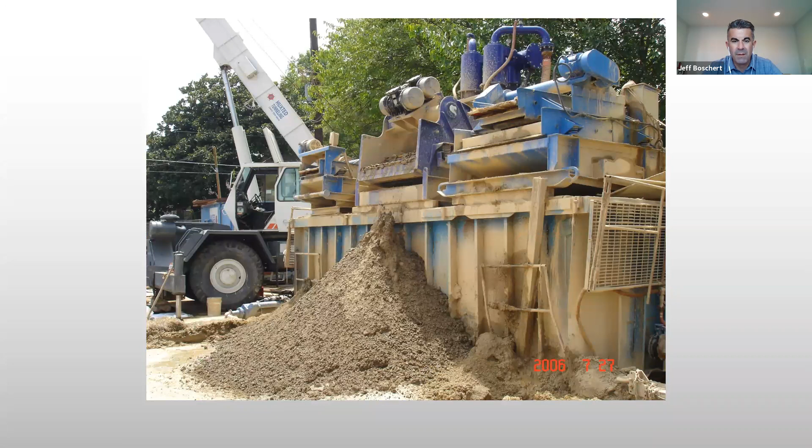This is up top. This is the shaker type separation plant. So again, these solids are being brought back in liquid form and then have to be separated up top. So it's a continuing operation of separation up top. This method's expensive just because of all the equipment and operations that are going on as they're installing the pipe.

This is just an image of a shaker type soil separator. Another shot here. This is actually a video, I think.

So again, this is a separation plant and three different types of screen shakers that are taking three different size particles off the top and falling, and these are transported away.

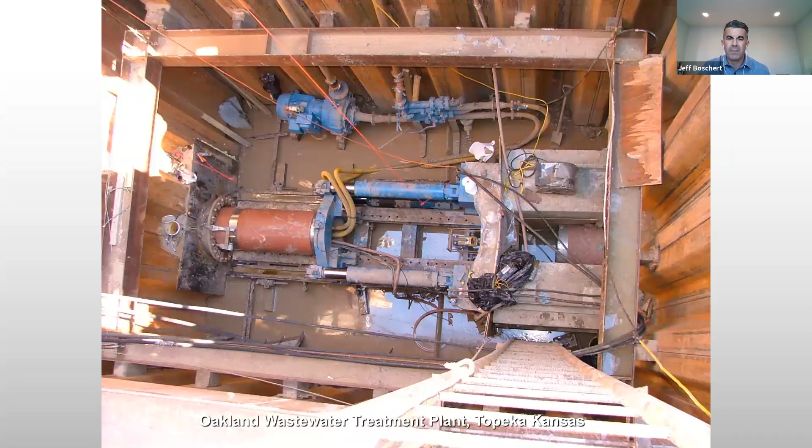This is down in the pit, and you can see this is the jacking pit. This is a Waler type cofferdam sheet pile shaft, and you can see the shaft seal right here where the pipe exits - again, high head of water. You've got to have the whole shaft sealed off to prevent infiltration of soil into the shaft. This is the laser right here.

This is the concrete thrust blocks that they poured, the jacking frame, slurry pumps, and then these soft lines here going to a feed and a return line. Here's the metering wheel that you saw in the video, and they're going.

When I took this picture, they were going underneath that building T, and this pipe here, this end of this pipe, going to the right - this went to the new pump station.

Another shot here, pushing pipe. Again, 20-inch ID, 500 millimeter diameter pipe. This was their soil separation plant.

Hey, that's it for slurry type microtunneling. I'm going to cover our jacking pipe here in about 15 to maybe 20 minutes, and then we'll be through with the lecture. But again, like I said earlier, I'd say 95% of the projects we're involved with today are using the pilot tube method or pilot tube guided boring method.

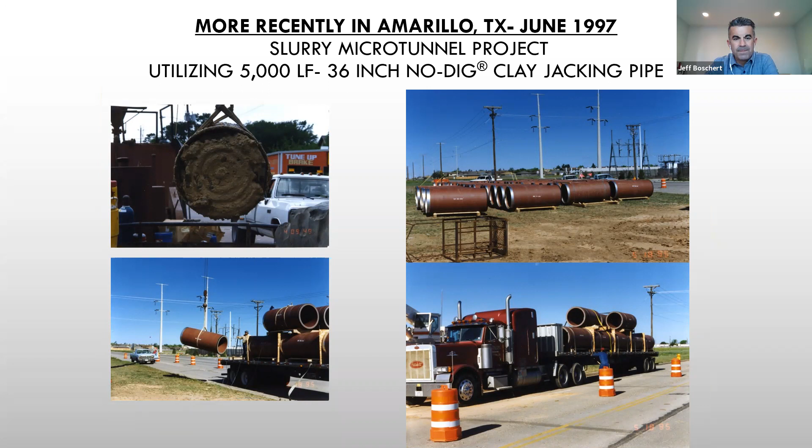You know, that old pipe, as good as it was, wasn't anything in comparison to what's made today. If you guys ever want to go to building products again, let me know, and I can set you up for a factory tour. It's kind of neat to see.

But as good as that old pipe ever was, even up into the early 1950s, they used steam to drive presses and extrude the pipe. That pipe was created day one with laminations within the cross section. What's made today you're going to see from some of the videos I have, but we make a tight, dense product with a fairly thick wall, and we have a compressive strength of about 18,000 psi. So when you team up that kind of compressive strength with a thick wall to generate a large end cross section, you can put a tremendous amount of axial jacking force on clay pipe.

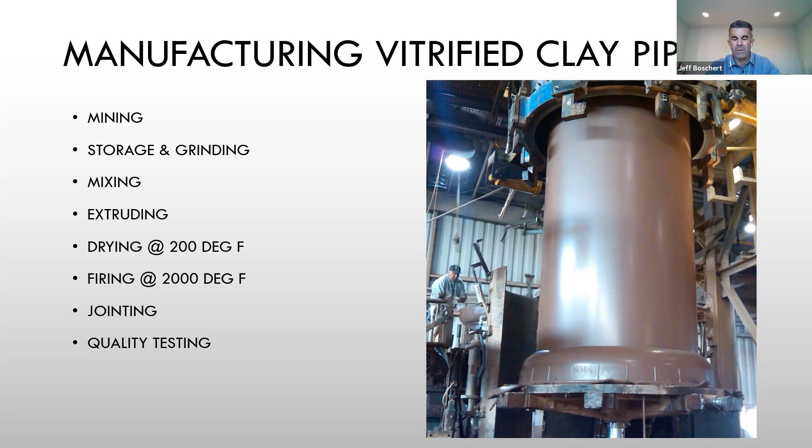This is a video of what they call the pug mill, so this is adding water to the blend of clay.

So in that video, the clays have already been mixed. They've been ground to a fine particle size, and they're adding water. At that stage of the game, it's about a 15% moisture content. But it goes through the pug mill into a vacuum chamber where they pull all the air particles out of it, and then it's hydraulically extruded.

So this is a video here, also in Phoenix, but this is making 8-inch bell and spigot pipe.

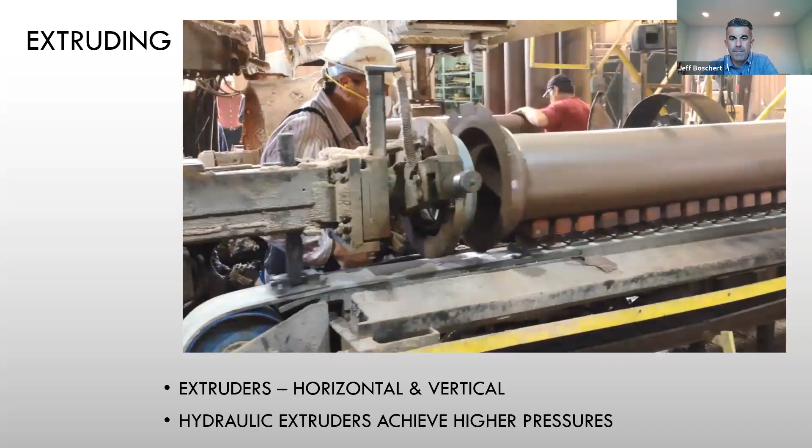So once the pipe are extruded, again, they're 15% moisture content when they extrude. If you go to the factory, you'd be fairly surprised at how dense that pipe is when it comes out of the press. Once they're extruded, the ends are trimmed, and then they're sent into a drying room.

These are some large diameter jacking pipe in a drying room, and they've got to be dried to a 1% moisture content before they can be transported to the kiln to be kiln fired.

So this is some bell and spigot pipe being set in what they would call a periodic or beehive kiln. This manufacturer is stacking these pipe two high. They're going to get as much product in there as they can, then close the door and run it through the firing cycle.

Kiln firing happens at 2,000 degrees Fahrenheit, and it turns that dirt, if you will, into a ceramic type material. This is a picture here of several periodic kilns lined up.

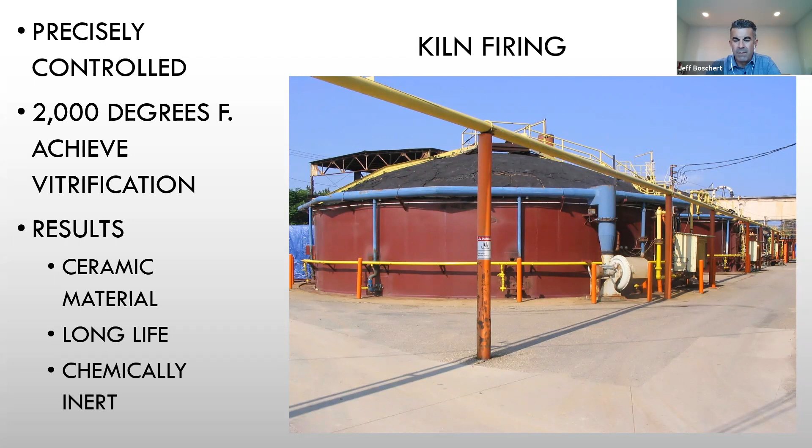But you know, today these kilns are all computer controlled. Most of the plants are gas fired, with a gas burner and an air blower. The kiln process goes from ambient temperature, slowly heating to 2,000 degrees, and depending on the pipe size, they hold it at that temperature for a certain time, then cool down at that same rate. This turns the clay into a ceramic, which has a long life and is chemically inert.

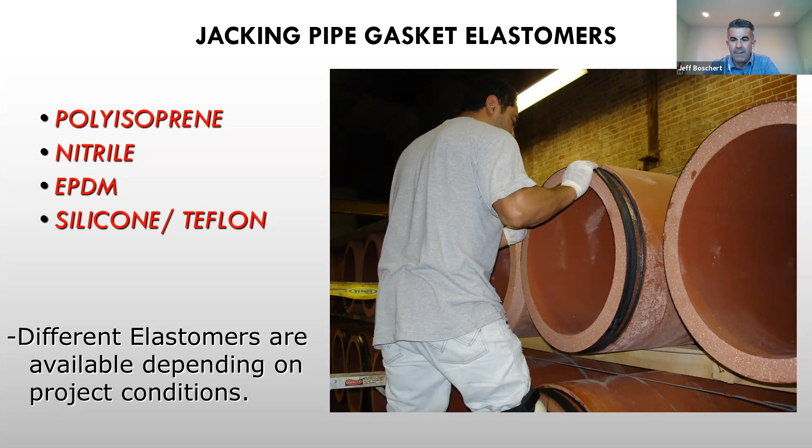For stainless steel collars, our standard is a 316 grade stainless steel. We're doing some projects in Hawaii and in the Seattle area where they're concerned about brackish water or salt water, so we're going to use a different type of collar. It's an AL6XN that resists that brackish water better than the standard 316 grade stainless.

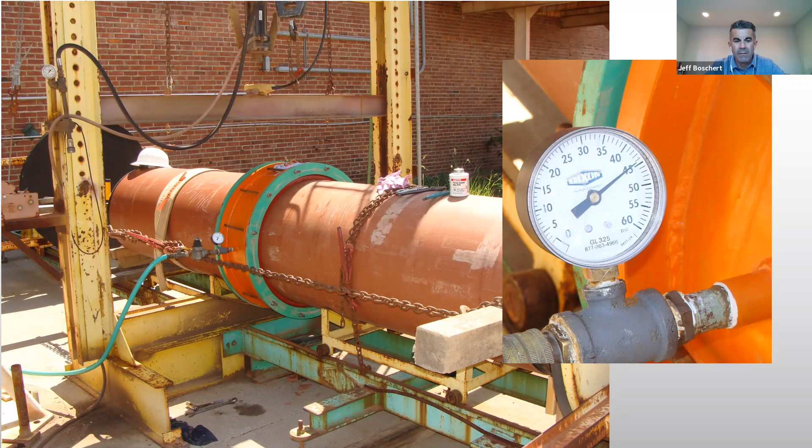Axial loading during installation with these tunnel methods is the greatest load that pipe will ever see in its life - commonly that axial jacking force the day they push it into the ground, because they're digging a hole just big enough for the pipe and will never see a conventional trench load on that pipe. You can compute it, but it's not much.

So how do you rate the pipe in terms of axial capacity? It's a fairly simple calculation - it's the ground OD minus the ID, giving you the cross-sectional end area of the pipe.

Here's an example for 18-inch pipe. It's got a bearing area on that end of 110 square inches, and we specify the pipe to be a minimum of 7,000 psi compressive strength, but there's a big safety factor in this number. For computations, we use this minimum number. So with a 110 square inch area and 7,000 psi, that pipe is rated for 384 tons. Then we apply another factor of safety of 2.5, so the published number for 18-inch pipe is 150 tons.

This manufacturer makes pipe up to 24 inches. So using a 2.5 safety factor, 8-inch pipe can take 45 tons, up to 24-inch pipe which can take 221 tons of axial jacking capacity.

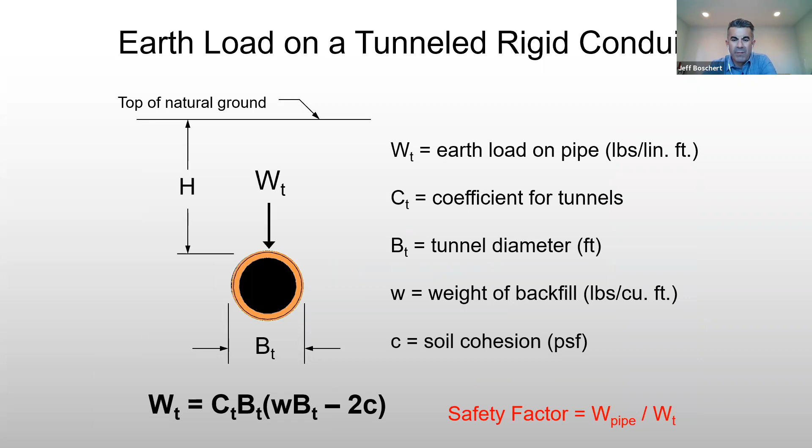Earth and live load - I mentioned this earlier. You can compute this earth load on the tunnel pipe. I'm not going to get too deep into the math, but you can also compute live load. Live load could be a concern if you're shallower than about 8 feet, and when you are, you can compute it.

Here's a couple of examples. I computed a 10-inch pipe with 28 feet of cover, and the earth load was 676 pounds per foot on the pipe. The pipe's rated for 2,400 pounds, so the safety factor is about 3.5.

Then here's one with a shallow bury. I put an HS20 live load on it and computed that load to be 525 pounds per linear foot acting on the pipe. Same pipe rated at 2,400 pounds per foot, so the safety factor is 4.5.

Lube ports - we don't use these too much in pilot tube, but for slurry tunnel projects. These pictures were from a pipe burst we did in the Phoenix area. We could put lube ports in the pipe, which would have to be accessible after the pipe was installed so they could go back in and plug those ports. This is a cored hole in the pipe using a ceramic epoxy, where you can attach threads and apply pipe lubricant to the outside of the pipe during installation.

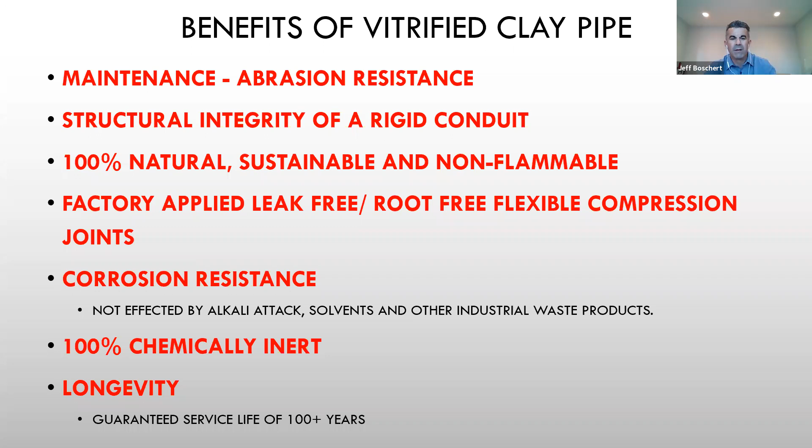Our biggest competitor really in the open cut world is PVC pipe, and PVC degrades over time, whether it's in the sun or underground. So they can't match us on longevity, and they can't match us on maintenance either, as far as cleaning tools, which is a big deal for gravity flow sewers.

Here's a couple of examples on the maintenance side. This was two 4-inch pipes, using a hydrojet cleaning truck running at 60 gallons per minute at 2,000 psi for cleaning. You can see no damage to the clay pipe after 5 minutes of jet pressure hit the outside. And the 4-inch SDR35 PVC pipe had 3 holes in it after 10 seconds of use.

So here's a couple of videos. I got these from the city of LA. This was an 8-inch main that had a lateral connection right here with a big root mass coming in. So this is before.

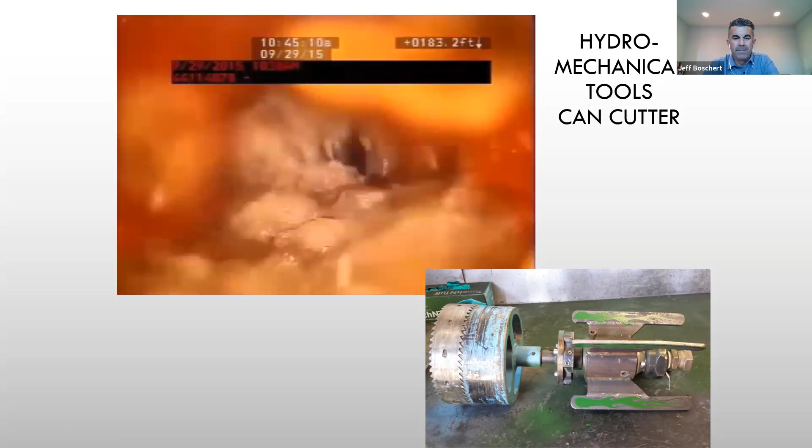We're pretty close. But we've done a bunch of pilot tube work up in Minneapolis, and they're a big clay pipe user for open cut. I was up there on a project in 2016 before the Super Bowl. They were revitalizing this area, and this pipe was undersized, so we were pilot tubing. We had a big jacking shaft at the corner of Nicollet and 12th Street, and we were parallel installing these new 15s and 18s next to this existing pipe. The existing pipe was in perfect shape, but it was just undersized.

Later I got this as-built from the city, and this pipe we were abandoning was 12-inch clay pipe, and we had several pieces right here within this jacking shaft that we retrieved. We sent a couple of them back to Logan Clay in Ohio and bearing tested those pipes. We pulled them out in 2016, and they were actually installed in 1896 according to this as-built. So the pipe was built, made, installed, and in service for 120 years.

Then we bearing tested them in 2016 at Logan Clay, and those pipes broke at 42% above the ASTM. They didn't degrade over time, and they were only removed from service because they were undersized for what they were building there in downtown Minneapolis.